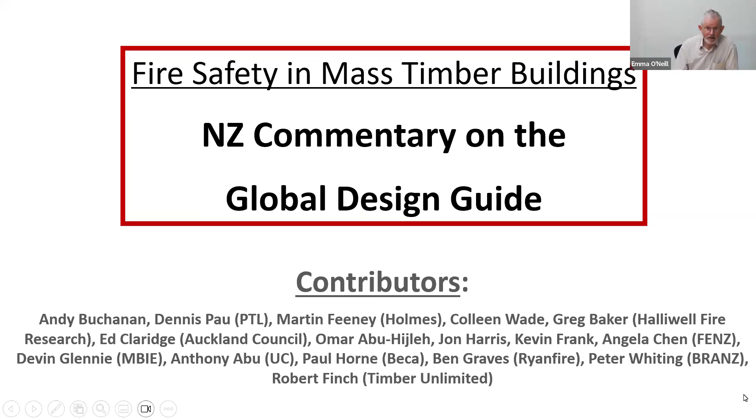Robert has introduced us to a lot of what we're going to be talking about. I'm going to get moving because I've got a lot of slides, and some of them I'm going to go through rather quickly, but let's get on with it. I don't have to tell you this.

What is mass timber? Well, it's glued laminated timber, glulam. It's laminated veneer lumber, LVL, for long, straight and strong things. And it's cross-laminated timber for walls, roofs and floors, anything you can make out of large flat panels.

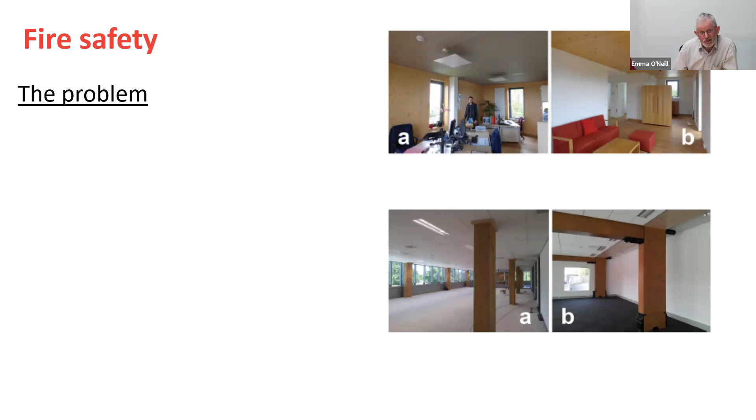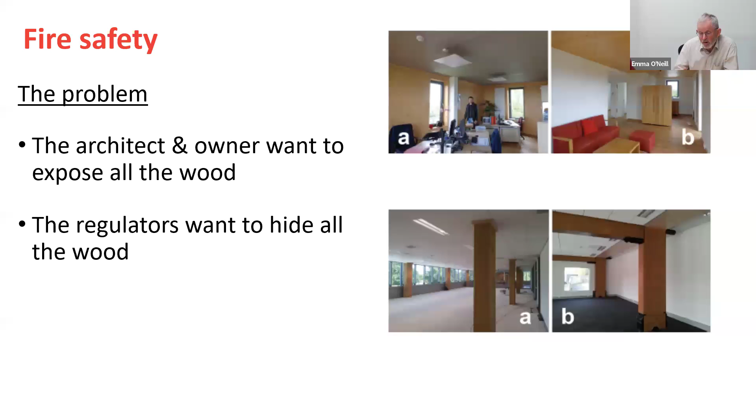Let's jump right into fire safety. What is the problem? It's as simple as this: the architect, the building owner and the supplier want to expose all the wood that they can, but the regulators want to hide as much wood as they can because they're afraid of it reducing the fire safety of the building.

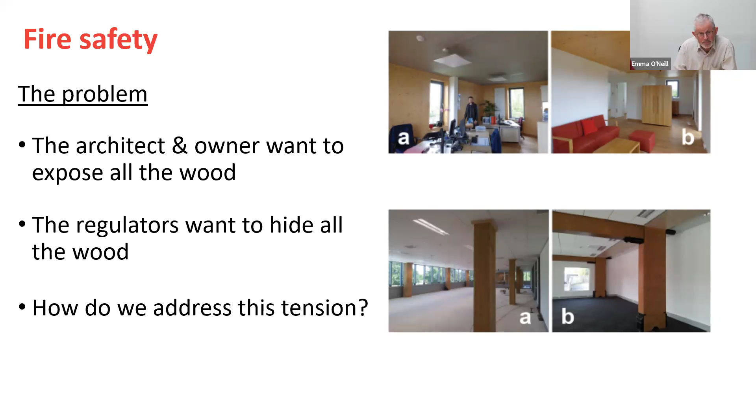So let me say a bit more about each one of those, because it's a little bit tricky, but at the end of the day, there's lots of information there.

The Global Design Guide was launched at FireNZ in 2022. That's the cover of the book. You can buy a hard copy, it's not cheap, but you can buy it from anywhere that sells books. And you can get a free online version from the Timber Unlimited website, or just Google it, lots of places.

What's in there are 14 chapters. I'm not going to go through them all because we'll be going through them all again. The authors were from 12 countries, including several from New Zealand. So that was the original document, but it was a global document and it did not refer to the New Zealand Building Code. It wasn't really useful to New Zealand designers.

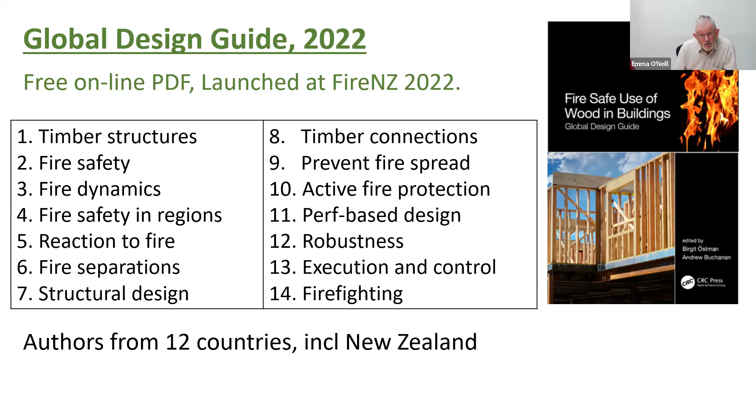So that's why we decided to write a New Zealand commentary. But on the way to that, we said, let's write the conclusions first, because people need to know what to do right now, just as Robert said. And this is a supplement to the acceptable solution and the verification method. That's why we call it the supplement.

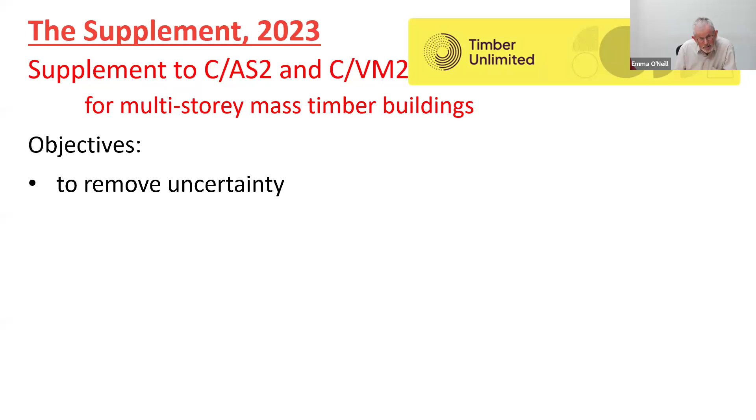And the objectives were to remove uncertainty in the design and construction of multi-storey buildings, especially multi-storey mass timber, to show what's possible, and to help owners, developers, architects, engineers, regulators and the timber industry so that everyone is on the same page.

This is not a building code, it's a guidance document. But the whole intention here was that if the guidance document had been written by the entire spectrum of people, from the designers and suppliers to regulators, then we hope it will be a useful document for everyone to use. And there may well be changes to the building code along these lines, but not yet.

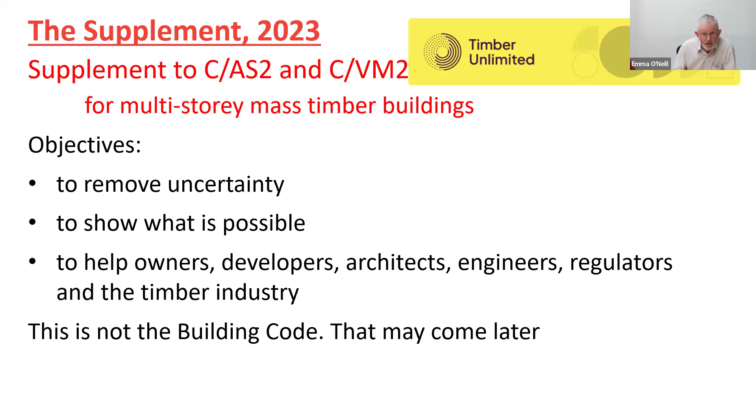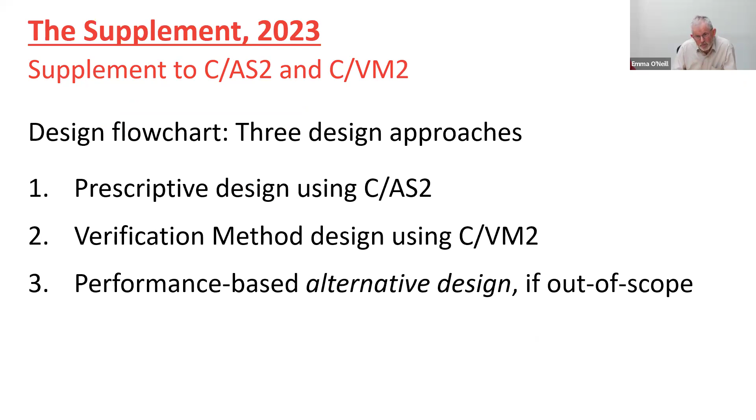Okay, just to say what's in there: a design flow chart with 3 design approaches. This is all obvious stuff, fire engineers know all this. The prescriptive design, a verification method, and a performance-based alternative design for buildings which are out of scope of the document. The flow chart looks like this.

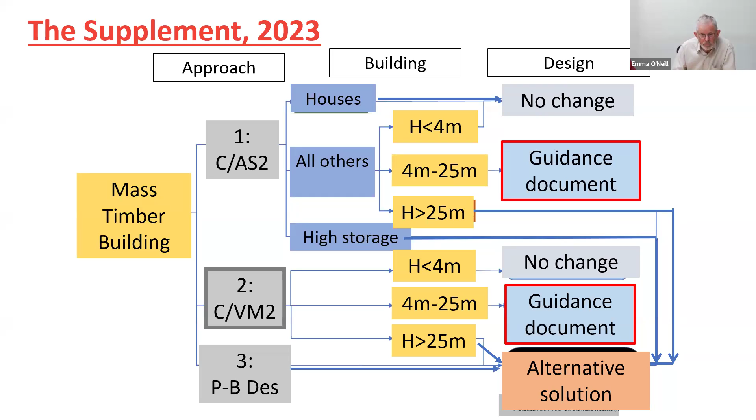I'm not going to spend any time on this, but it's a very useful flow chart. Angela Chen at FENZ drew this flow chart for us, and it just is a guidance of how to get through the document and which buildings it applies to and which ones don't, and when you've got to do an alternative solution.

A few details in there. This table is a very important table, and if you're doing a prescriptive design... this is really aimed at architects, engineers and builders who are not fire engineers. You can see here on the left-hand side, we've got different heights of building, because height is very important.

And then we've got sprinkled and unsprinkled buildings. If we're less than 4 meters in height, in other words 1- and 2-story buildings, we just follow the 30 or 60 minutes from the building code, and you can put in as much wood as you want, WU, wood unlimited. If it's an unsprinkled building, as the building gets taller, you can expose less wood. For a sprinkled building, you can use more wood. You can read all that stuff there.

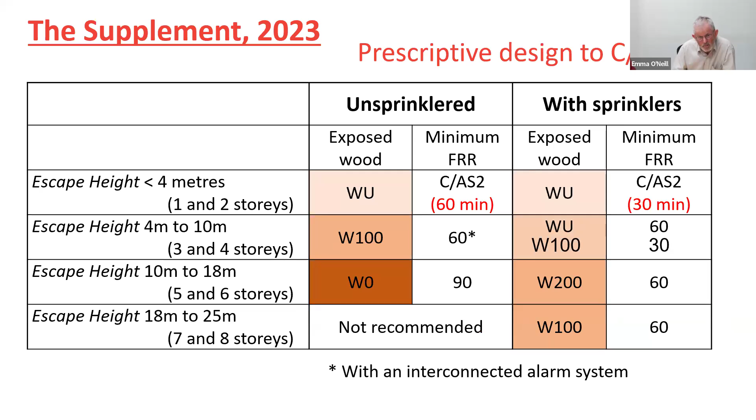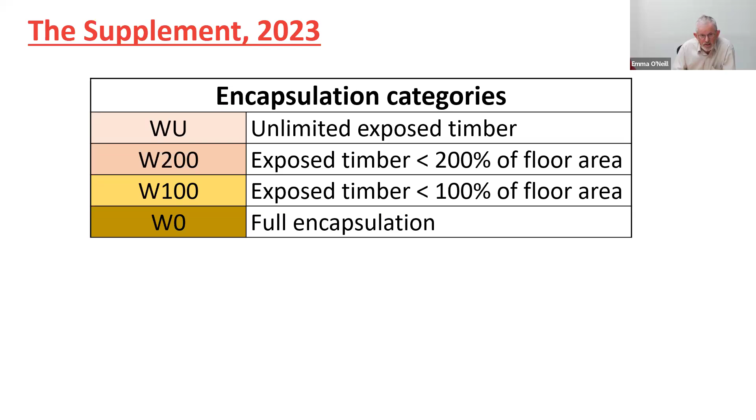I'm not going into any detail, but I am going to explain what we mean by W100, W200, and WU, which is unlimited. W200 means you can expose wood up to 200% of the floor area, lots of wood. W100 is intermediate. W0 is exposed no wood—it's full encapsulation. I'll quickly give some examples of those.

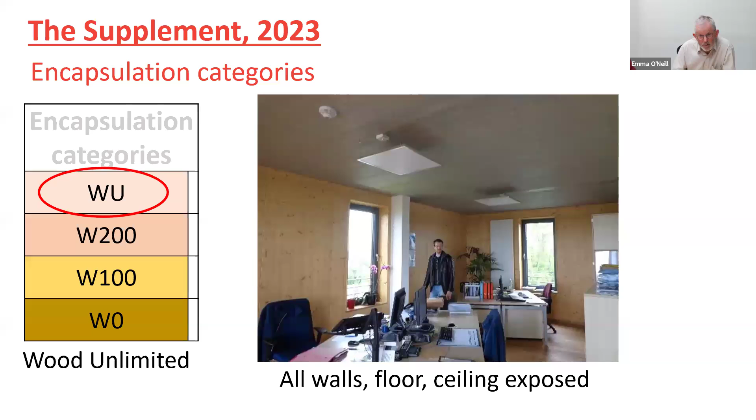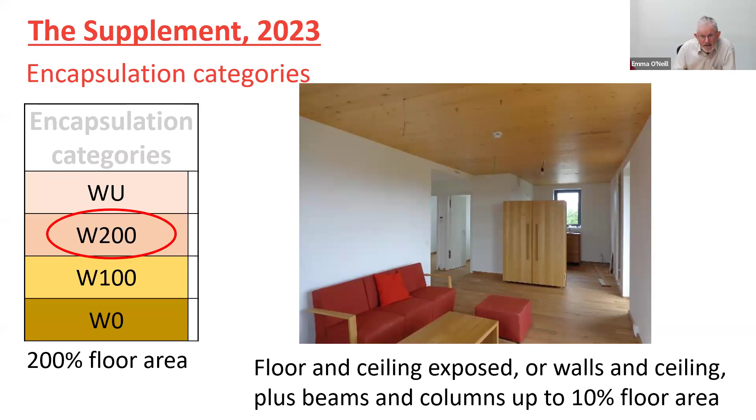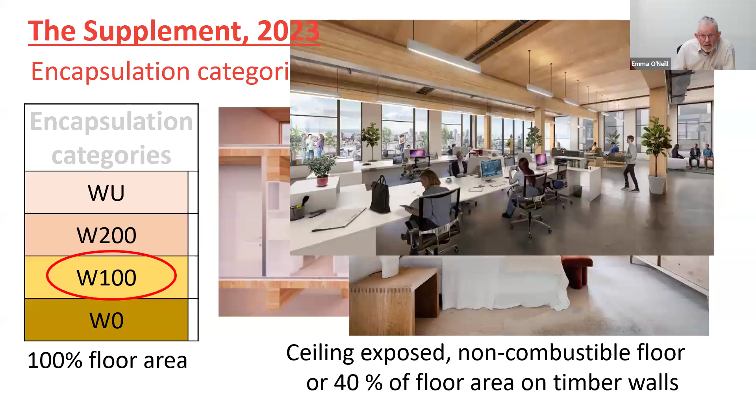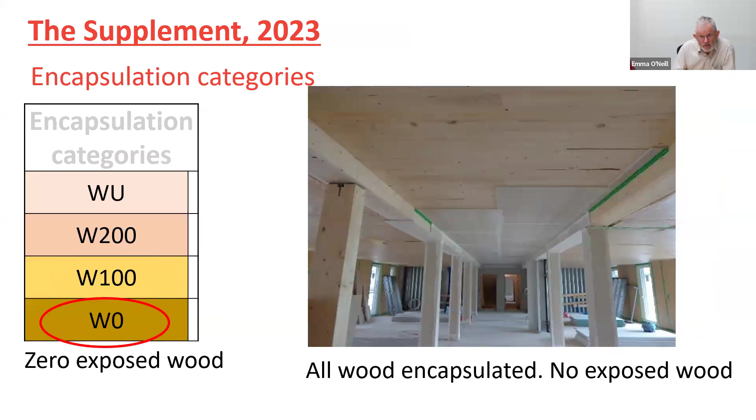The W0 is for zero exposed wood, and it's a building like this. You can see a lot of wood here, but it's all being encapsulated. The gypsum board is all being placed, and there will be no wood visible in that building. This building, the Brock Commons building in Vancouver, which was for a short time the tallest mass timber building in the world—you can see a lot of wood there during construction, but when it was finished, every piece of wood was covered in 3 layers of type X gypsum board, and there was no wood exposed at all. Why was that? Because the fire authorities would only allow that tall residential building if that was the case.

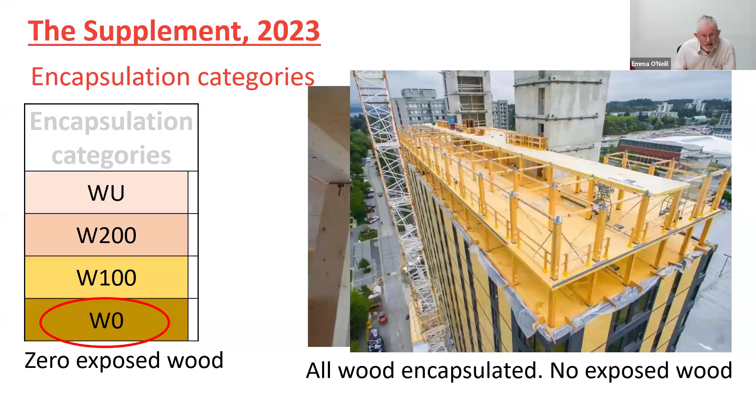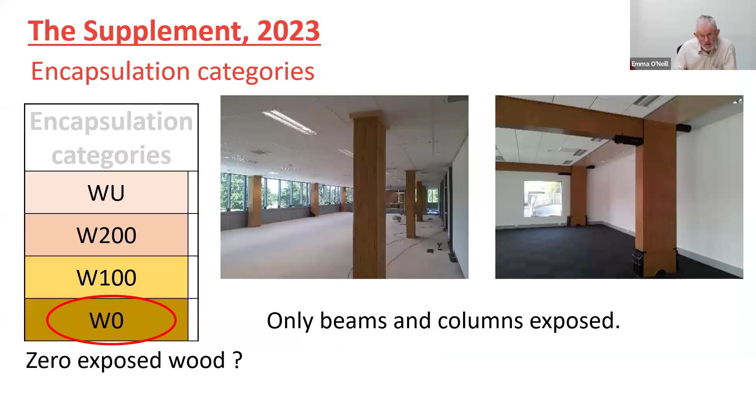Sometimes there's an intermediate case where there are just beams and columns. If there are beams and columns with no flat surfaces, then there's not a whole lot of wood to get involved as fuel load, and so this could be considered zero, but there's a question mark there because it has to be considered on a case-by-case basis.

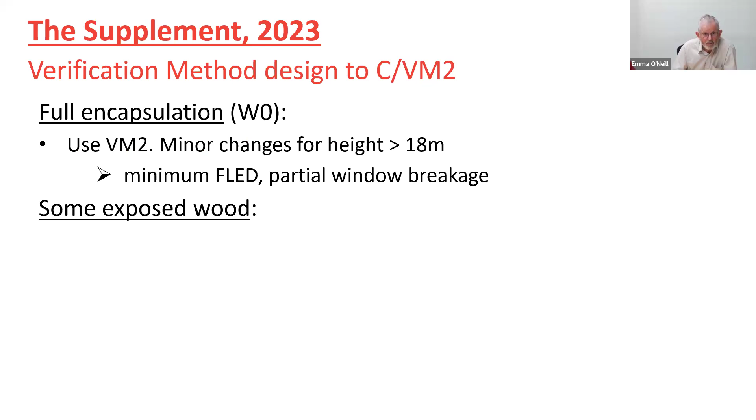Okay, a couple more things about the supplement. It talks about full encapsulation or some exposed wood. For the full encapsulation case, the fire engineer can ignore the wood—just use verification method VM2, with a few changes for tall buildings.

If there is exposed wood, that wood has to be included in the fire load. This is really the reason for all of this stuff, because the New Zealand Building Code does not anticipate an exposed wood structure which might double the fuel load, because it's all written around steel and concrete buildings. So the story here is that the fuel load, the wood which is exposed, must be included in the fuel load for the engineering calculations, and all the other wood has to be encapsulated.

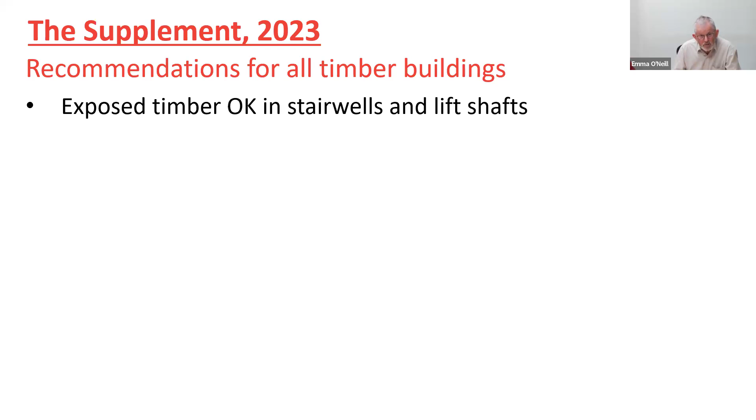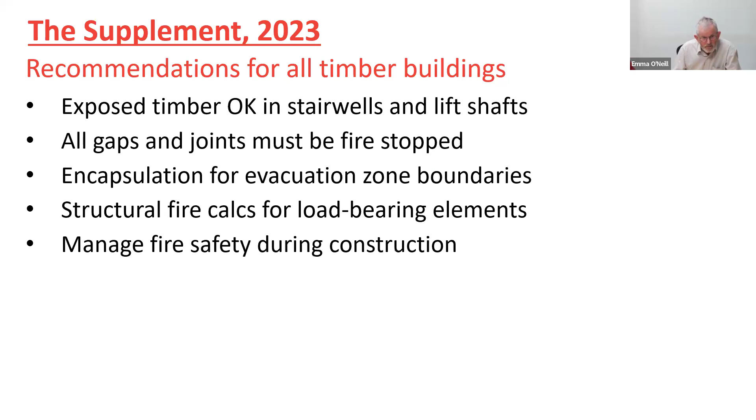The methods for doing that are all in the Global Design Guide and the New Zealand Commentary. There are a few more recommendations in here, which I'll go through quickly to address real problems in real buildings. It's okay to expose wood in stairwells and lift shafts. All gaps and joints must be fire stopped. Evacuation zone boundaries have to be encapsulated. Structural fire calcs, I'm going to go into in a bit more detail. Fire safety during construction is very important—I'll come back to that.

But these special things really are for tall buildings, because these concerns about fire safety in a mass timber building are just not a problem for 1- and 2- or 3-story buildings. But when we start getting to 5, 10, 15-story buildings, then there are big concerns.

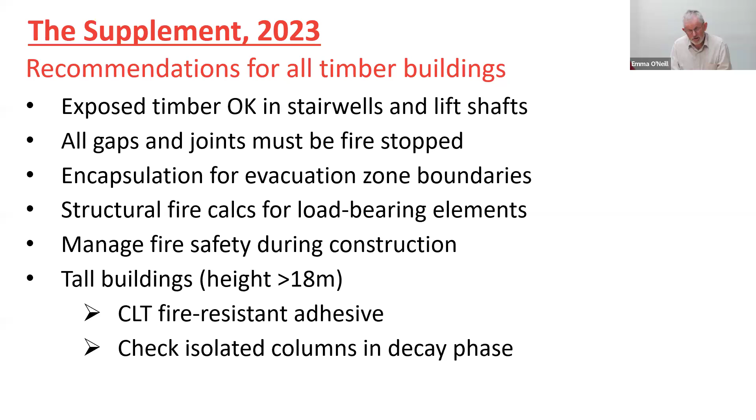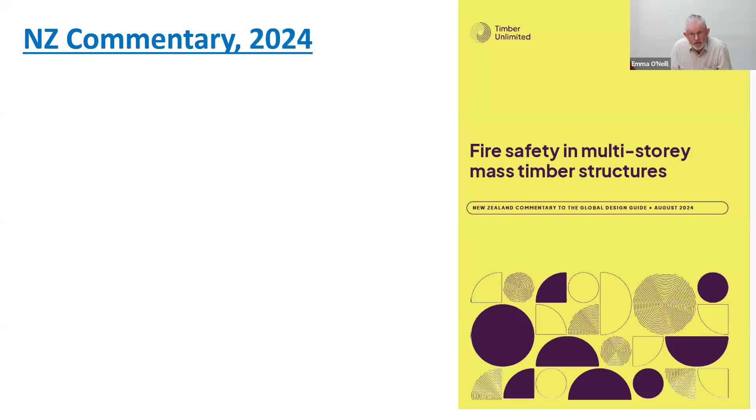And that's why this stuff is all related to height. Okay, that was the document—we've had two documents now. We've talked about the Global Design Guide and we've talked about the supplement. I'm now talking about the third document, which is really the talk of today, which is the New Zealand Commentary, which was just published in August, and that's the cover of it. Once again, all of these documents are free online as PDFs. They're available on the Timber Unlimited website, and this part of it is a draft for public comment.

Comments are welcome. However, as Robert said, the comments are not going to be addressed very quickly until there's a funding mechanism to do that.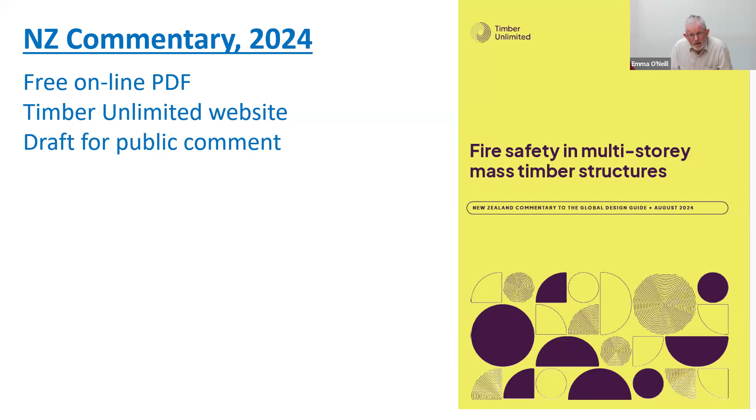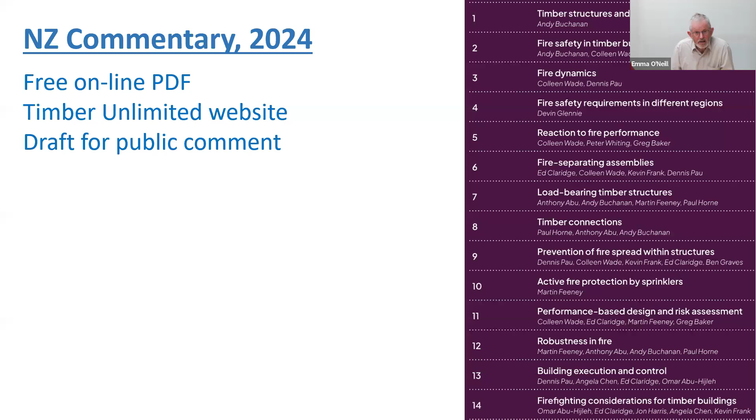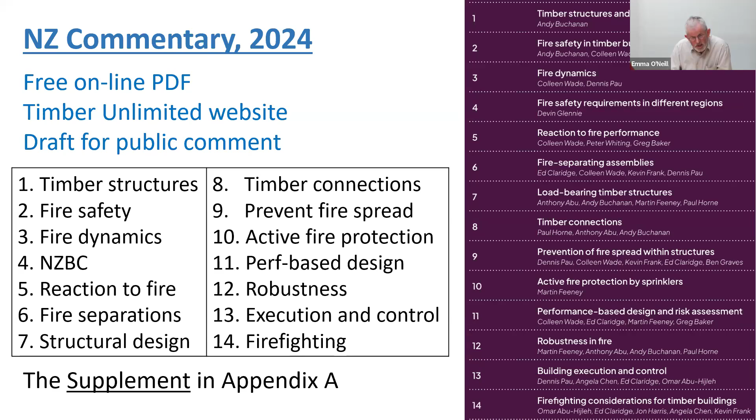Any of the authors. So that's now on the right-hand side, the table of contents of the commentary. There are 14 chapters, the same 14 chapters as in the Global Design Guide, and this document has been written alongside it. In small print, you'll see all the authors of each chapter listed, and they're all people in the New Zealand fire engineering community. So there are the 14 chapters, and off the bottom of the list, Appendix A is the supplement we've been talking about. So we said there were 3 documents, but there are really only 2, because the supplement is now Appendix A to the commentary.

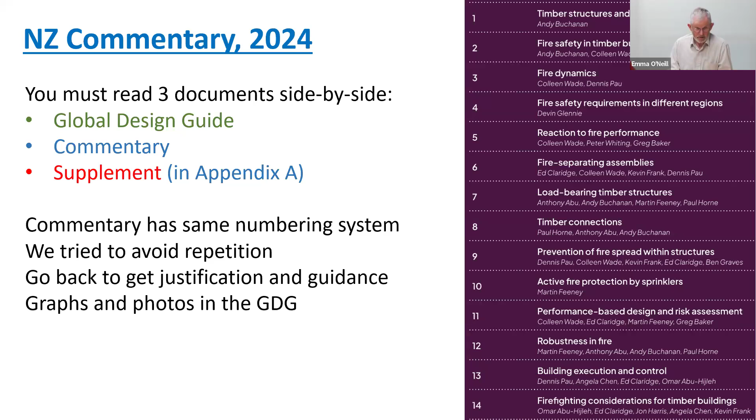This is very important. Robert said this: if you're going to use this stuff, you must read 3 documents side by side - the Global Design Guide, the New Zealand commentary, and the supplement, which is in Appendix A of the commentary. The commentary has the same numbering system. We tried to avoid repetition, but you'll have to go back sometimes to get justification and guidance, because lots of stuff, graphs and photos, are in the Global Design Guide, and for copyright reasons and other reasons, we haven't repeated that in the commentary. You need to look at both documents. But if you've got 2 screens on your computer, it'll be no trouble at all.

So what I'm going to do now is run through these chapters one by one. I can't tell you a whole lot, but I can tell you a little bit about each chapter.

Chapter 1 is about timber buildings and timber and wood products, and what it describes is what's different in New Zealand. It says something about CLT and LVL, where they're available, and what their properties are. So there's no fire engineering in chapter 1 - it's just about wood properties and timber buildings.

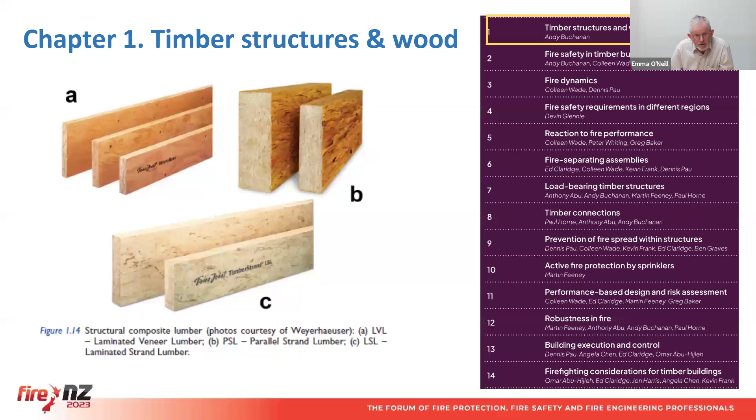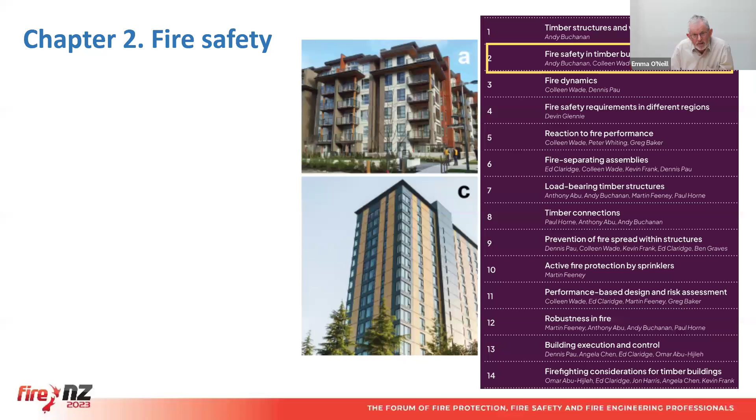Chapter 2 is a sort of fire safety 101, if you like - an introduction to fire safety for non-fire engineers. It talks about fire safety in lots of buildings, but especially in tall buildings, as I mentioned before. These are tall timber buildings, and fire safety in those is very important.

There are 3 or 4 words I want to talk about here because they're explained in this chapter. The first is the concept of fire resistance. You all know about fire resistance - it's 30-30-30 or 60-60-60, which relate to structural performance, integrity, and insulation. That's old stuff. If you want to know more about encapsulation, I'll mention it a bit more, but encapsulation is defined in chapter 2.

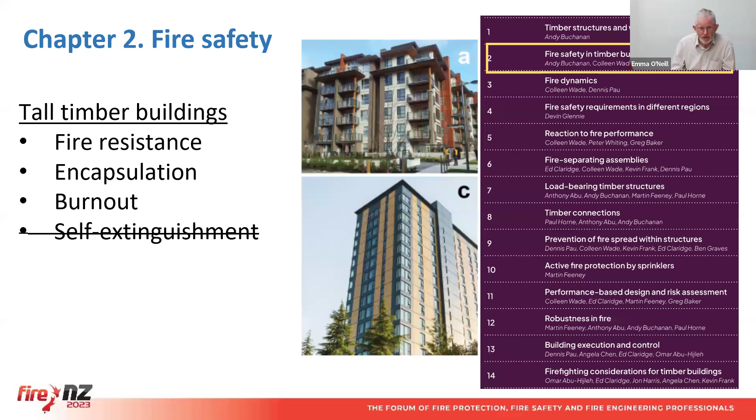The third thing is this concept of burnout. By burnout, we mean a fire occurring in a building with no intervention - sprinklers not working, fire brigade unable to get there - so the fire is left to burn itself out. That's really the fear in a timber building: when will the fire go out? When we started writing this, we said you just wait until self-extinguishment occurs, but I've crossed that word out because we don't use self-extinguishment - it's such an emotive word, it means different things to different people. In a fire in a timber building, the flaming will stop, but the charring may never stop, so we can't guarantee self-extinguishment. At some point, the firefighters are going to have to get into that building and do something about it. So that's just a definition of those terms.

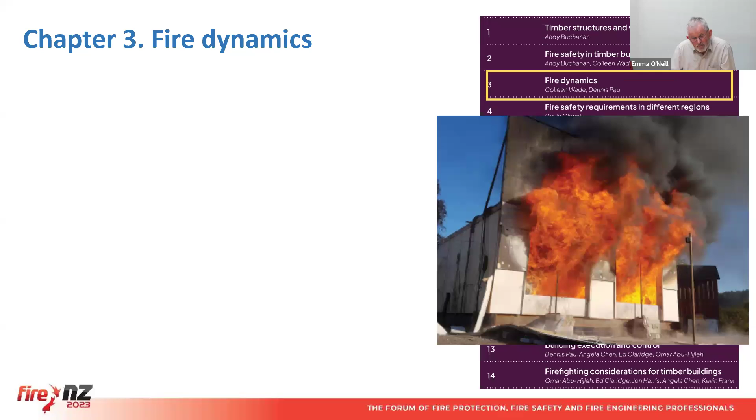Okay, I'm going to jump to chapter 3, fire dynamics - what is going on inside the building with all the flaming of the fuel, including exposed wood. You can see a picture with huge flames coming out windows, and that's something that will happen. If you double the amount of fuel in the building, you'll extend the duration of the fire and have much bigger flames out the windows. The severity, or the temperatures in the fire, may not be much different, but the duration of burning and the flaming out the window increases. So go back.

Now, Colleen Wade, who was at BRANZ, this is her chapter, and she wrote this chapter in the International Global Design Guide. What's in the commentary is just an update of that, brought back to New Zealand conditions. The main part is what we call the iterative method for fire severity, often called the Brandon method, because Daniel Brandon in Sweden developed this method to calculate fire severity in a compartment with exposed wood. There's also some relaxation to that method, some limitations, details, recommendations for external fire spread, and information on char depth calculations, since an output of the iterative method is the char depth when flaming combustion stops. There are also worked examples in there.

So from a fire severity point of view, for a fire engineer starting work, especially for VM2 or alternative solution, this is the critical chapter to get into. This tells you about the fire.

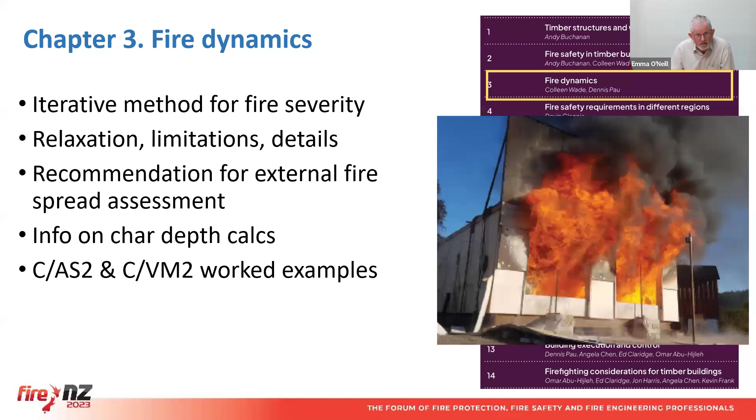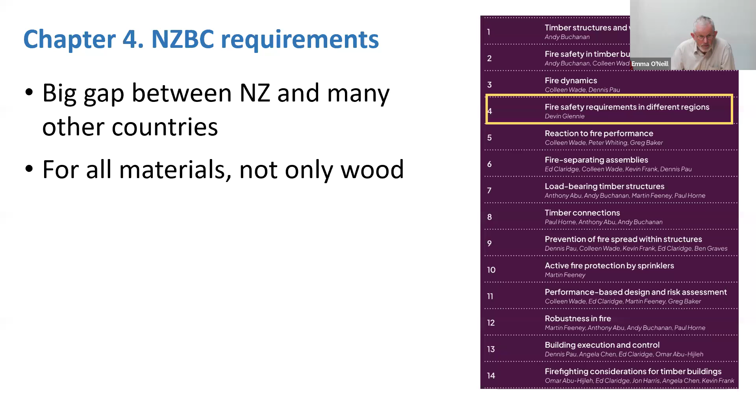Chapter 4 is about the building code requirements. In the original design guide, it's got a comparison of all the countries of the world. But what Devin Glennie from MBIE has done in the commentary is zero in on the New Zealand requirements. One of the things he's pointed out is that there's a big gap between New Zealand and many other countries.

I'll just show this little chart, which is in there, taken from Build magazine in 2021. What it shows is that in these 3 countries, if you compare the fire resistance ratings - I'll zero in on an 8-story building - in New Zealand you'd need 30-minute fire resistance for an 8-story building with sprinklers. In the US, it would be 120 minutes. In Australia, it would be 90 minutes.

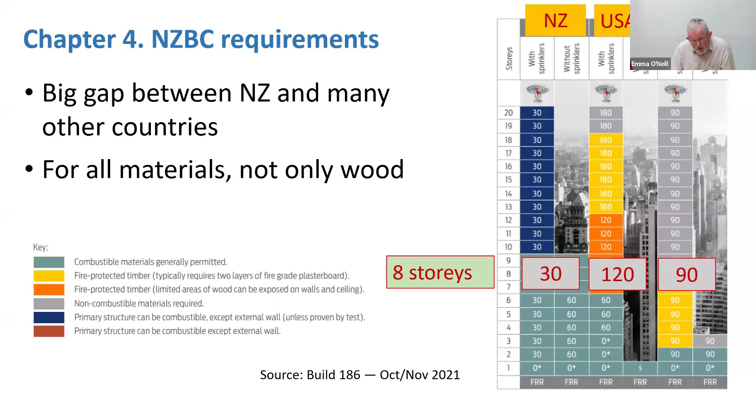So our fire resistance ratings - and this is not just for wood, this is for all materials, but if wood is involved then we get more concerned about it - if you want to know more about that, read chapter 4.

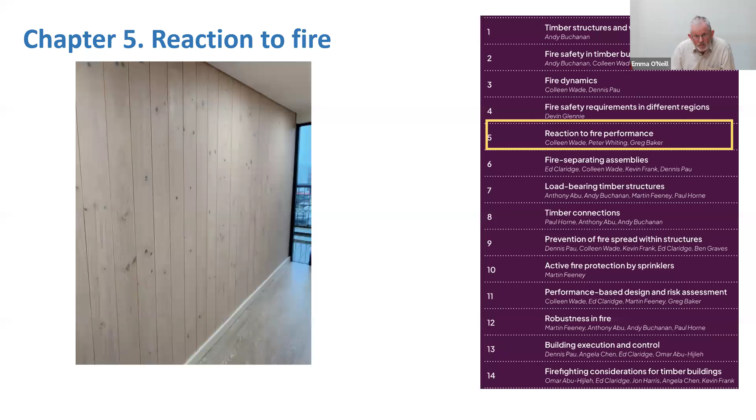Okay, chapter 5, reaction to fire. We're talking here about the early fire hazard, and these are photographs which Ed Claridge from Auckland Council has put in, because these are buildings he's been involved in, and places and buildings where we have to address the group number to avoid rapid flame spread over the surfaces.

So these restrictions and the types of coatings available and the New Zealand building code requirements for group numbers are all in chapter 5, along with the translation of the European requirements, which was done when the group numbers were introduced, to make sure that equivalent products from other countries can be used. That's all there in chapter 5.

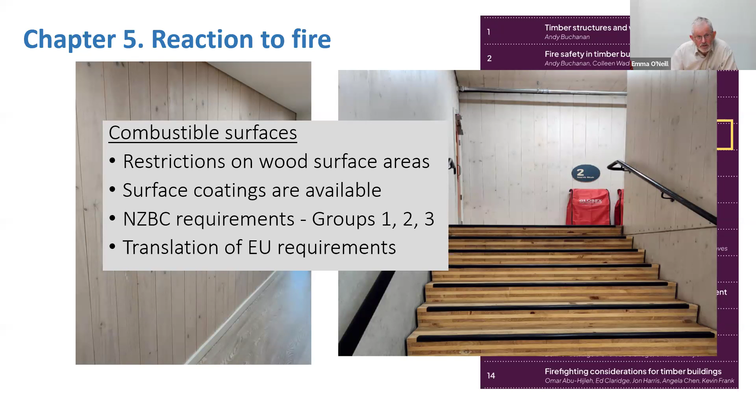Chapter 6 - I'd have to say here we're going to see 2 chapters, because chapter 6 is about fire separating assemblies, and chapter 9, a bit later on, prevention of fire spread within structures. There's quite a lot of overlap between these chapters, but Ed Claridge put this chapter together, and Dennis Pau put chapter 9 together. I'll just let you know, you may find that you get referred to another chapter. The separating assemblies are all about how to produce walls and floors which have got fire resistance ratings to prevent the fire spreading from one compartment to another.

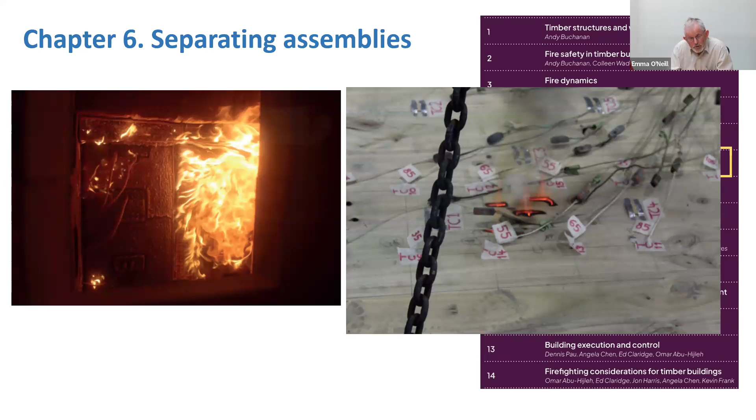All of that stuff is spelled out in Chapter 6 of the Global Design Guide, modified for New Zealand conditions in the New Zealand commentary.

This is also in Chapter 6, the criteria, the test methods, protective materials. Encapsulation is defined again, and it's a bit tricky. Full encapsulation means the wood never sees the fire and doesn't get hot.

We've got to be very careful with these words about partial encapsulation and limited encapsulation, because there are two issues here. One is not thick enough encapsulation, so the wood starts charring after a certain time. The other problem is where you've got encapsulation on some walls and not the other.

You've got to look up the definition before you use those tools, and then calculation methods.

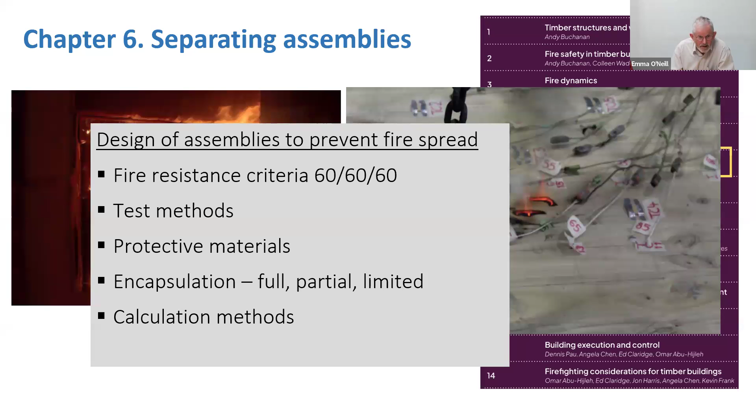Okay, I'm now jumping to 7 and 8, because these are for structural engineers. Chapter 7 is load-bearing timber structures, structural performance, and Chapter 8 is about timber connections. Anthony Abu from the university, with help from others, wrote Chapter 7, and Paul Horne from Beca and the university wrote Chapter 8.

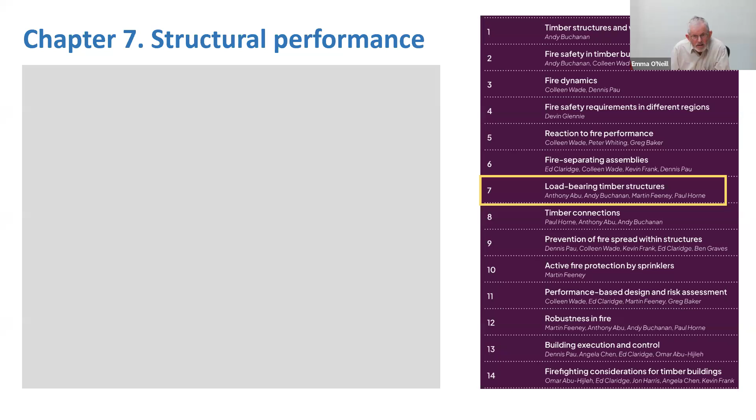I can only say a little bit here, but Chapter 7 has some interesting stuff. For the structural engineers listening, you should all be aware of the joint standard, AS/NZS 1720 Part 4. This has not yet been adopted by MBIE, but it is what most people are using. It's a companion document to the new 1720 Part 1, which is the new Timber Design Code.

The old document, 3603, had a chapter on fire. The new NZ 1720 Part 1 says nothing about fire because it's here in this document. The new thing which appeared from 3603 was the zero strength layer of 7 millimeters.

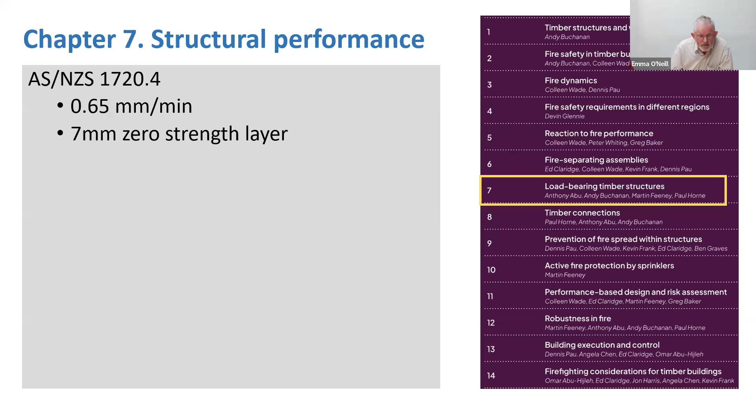However, there's a lot going on in the world of structural fire engineering, and the next block of stuff is in Eurocode 5, because we're watching what goes on in Europe, as they're more advanced than we are. What we've put into the commentary are these other requirements from Eurocode 5.

It's the same charring rate of 0.65 millimeters a minute for a plane surface, like a slab or a wall, but to allow for the corner rounding at beams and columns, which used to be in 3603, the charring rate increased to 0.7 millimeters a minute.

But the one thing that will worry some of you is that after a lot of research, the zero strength layer has been increased from 7 millimeters to 10 for tension and bending, or 14 for compression members. So that will make a change, and that makes things worse for designers.

On the other hand, to increase the characteristic strength from the 5th percentile to the 20th percentile, you can increase the strength by 15% according to that. I'm not going to say any more. If you want the details of this, you go and look there.

These new requirements are not in the New Zealand Building Code, but they are the direction the world is heading. If you're designing a very major, critical, tall timber building, then the recommendation is that you would use these new requirements.

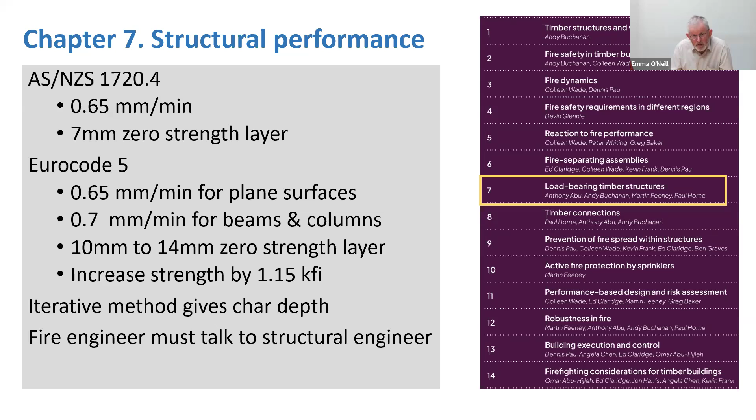Just also to remind you that the iterative method, the Brandon method from Chapter 3, gives you the char depth, and the fire engineer must talk to the structural engineer. For a steel and concrete building, the fire engineer and the structural engineer can exist in different offices and never talk to each other. But if you've got a mass timber building, you have to talk to each other because there's so much overlap.

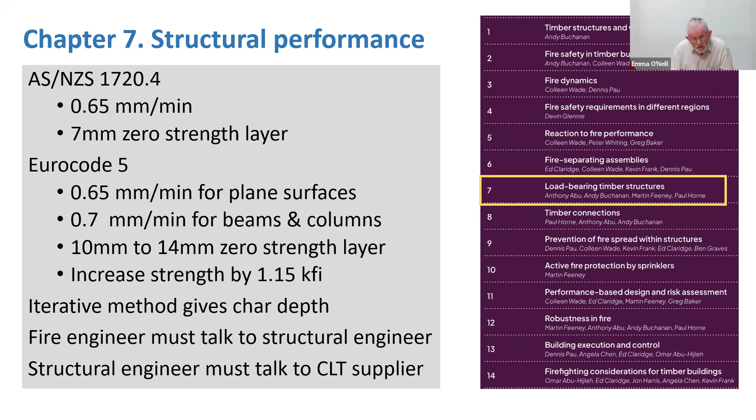And the structural engineer must talk to the CLT supplier, because for most CLT that we have, certainly for Red Stag and XLAM, the design methods with charring, you don't go that way. You go to the manufacturer's load span tables and look at those, and if you've got a problem with them, you go and talk to them.

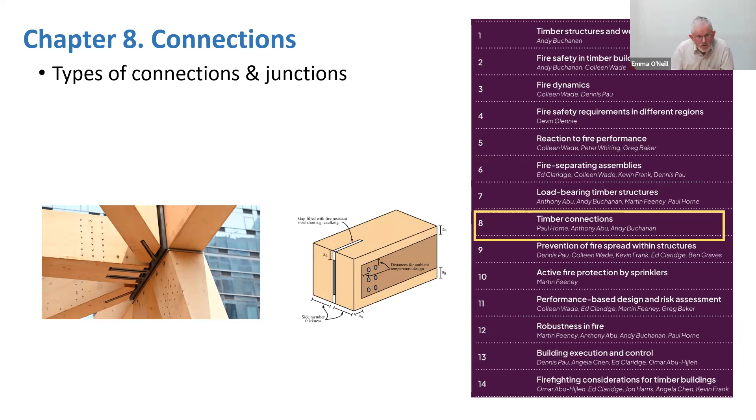Okay, that's Chapter 7. Chapter 8, connections. Here's a nice photo of a connection with internal dowel plates and a sketch from the commentary, which Paul Horne has put together. This chapter talks about types of connections and junctions, exposed, concealed, examples, design approaches, detailing, protection. And this is not so easy.

Designing beams and columns, in theory, is easy. If you know how much charring there is and how much wood is left, you just do your design. But it's much more difficult for connections, especially if there's exposed steel.

What Paul has done in this part of the commentary is gone back and leaned on Eurocode 5. He says if you want to do it in a quick and conservative way, he's given some guidance from that document. If you want to dig into it and do it properly and thoroughly, the suggestion is to go to Eurocode 5, because they are far ahead of anything else in North America, New Zealand, or Australia in terms of understanding the fire performance of connections like this.

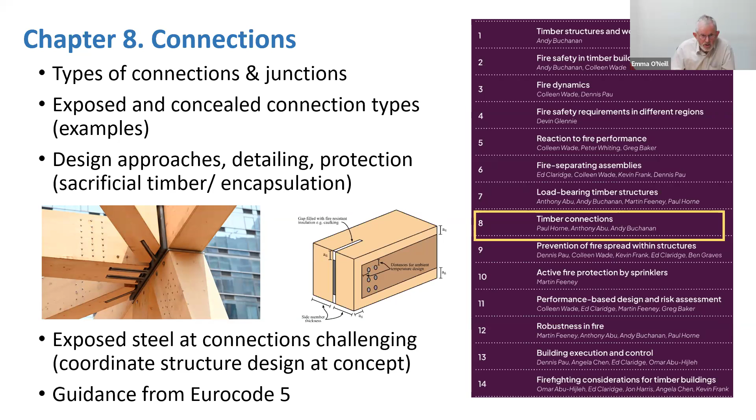The manufacturers are coming through this, and one of the co-authors of this chapter got some assistance from Ryan Fire, because they're the people who've done a lot of these tests, and I'd like to thank them for their assistance in this chapter.

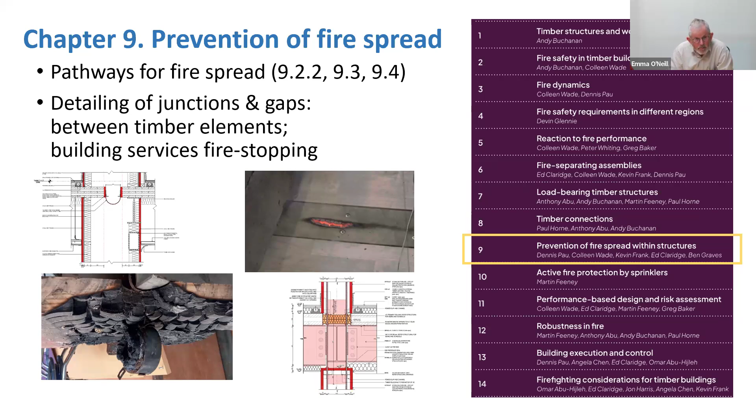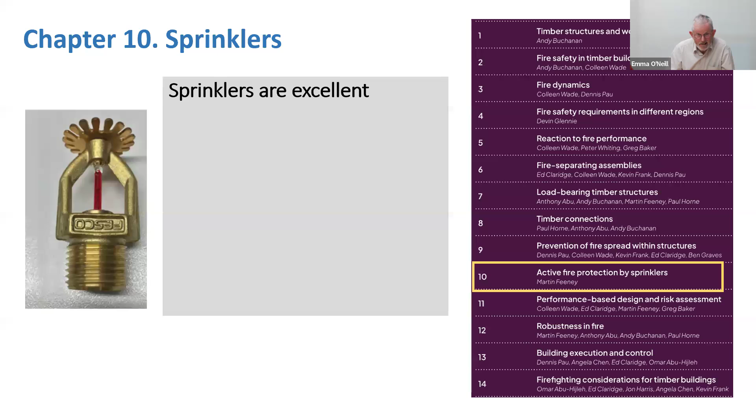So that's Chapter 9. Chapter 10 is about sprinklers, active fire protection by sprinklers, and this is really simple stuff, but at the end of the day, it's not so simple. The simple thing is that sprinklers are fantastic. They're the best way you can improve the fire safety in a building. You get no flashover, and if they work properly, you need zero fire resistance.

However, they don't always work. We cannot rely on them 100% because there might not be enough water in the street, they might be down for maintenance, or there may have been an explosion or an earthquake or something, which we'd rather not know about, but we have to allow for that. So for most buildings, we have to provide structural fire resistance for burnout, even if there are sprinklers, on the basis that we cannot rely on the sprinklers completely.

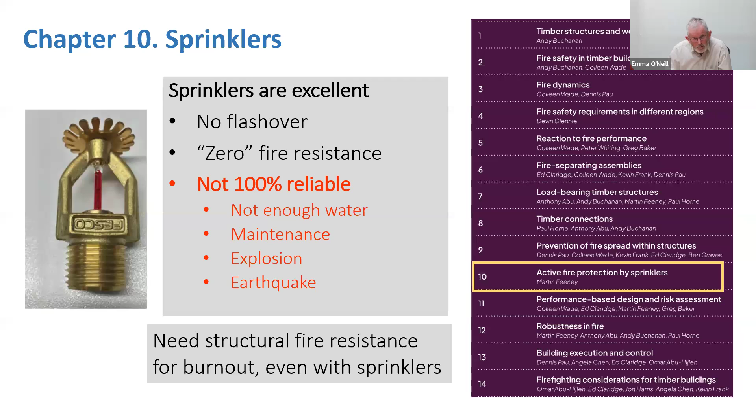Martin's written something about that, and there's more about that in Chapter 12 I'll come to in a minute. So these chapters at the end are less about practical details; they're more about the philosophy behind it and where to go. If you're doing an alternative solution and you want justification, go see Chapter 10.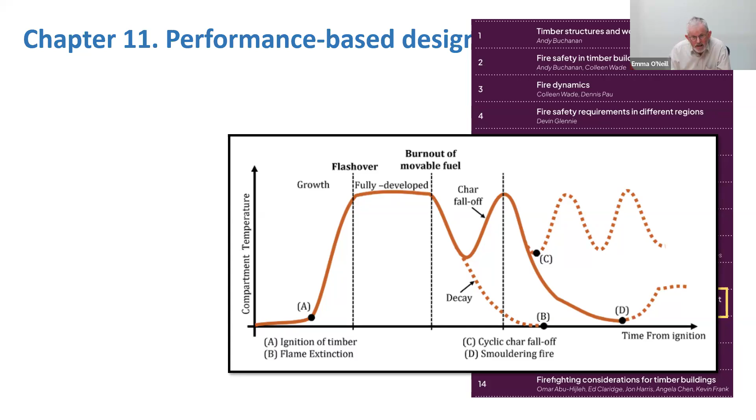You can see in this graph here, fire growth, ignition, fully developed fire, and then the fire going out towards burnout. What we really don't want is falling off of protection so that we get a second flashover, or a third, or a fourth. The philosophy behind that is all written in here.

Colleen talks about the principles of performance-based design: determine the objectives, define the fire scenarios, what are the pathways to compliance, and what is the risk assessment. So that's all in there.

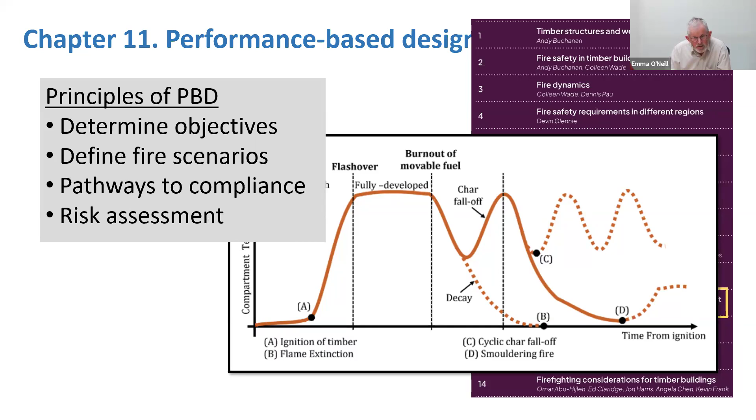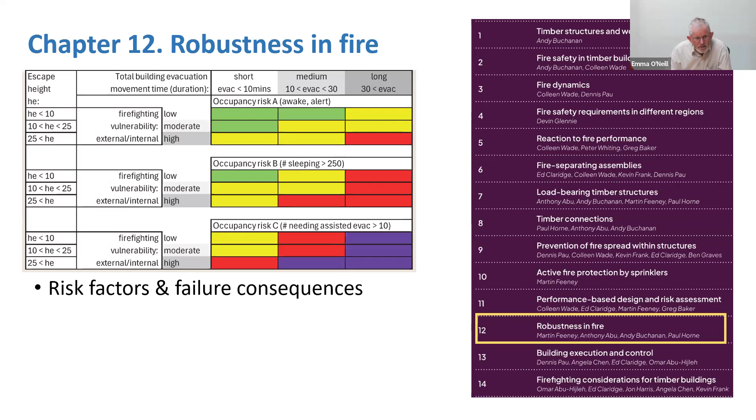Chapter 12, Martin Feeney's put together a risk matrix, which is very useful. We don't have time to go into it now, but Martin has done this, and it looks at the risk factors and the failure consequences. It gives a background to the FM factor, which reduces the fire resistance for putting in sprinklers, the exposed surface area limits, and the strength reduction with temperature, which is a bit of a red flag, only mentioned here and nowhere else.

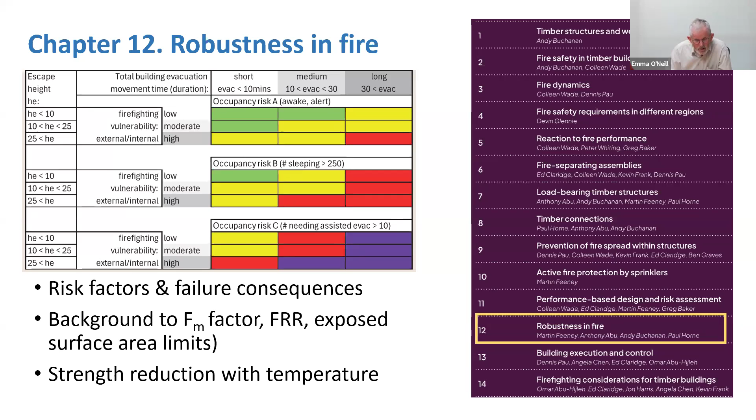A lot of you heard Jean-Marc Franssen speaking at seminars last year when he visited New Zealand, and we know that if you have columns exposed to fire, there's a thermal wave in the column which will reduce the strength as the fire's going out, even with quite low temperatures. I won't say more, but it's mentioned in chapter 12 and also chapter 7.

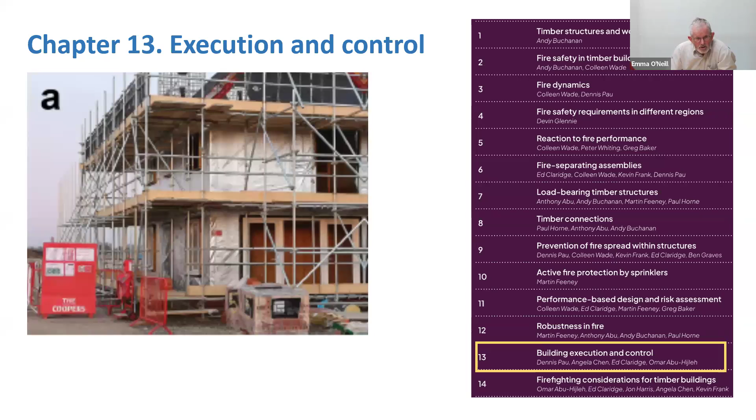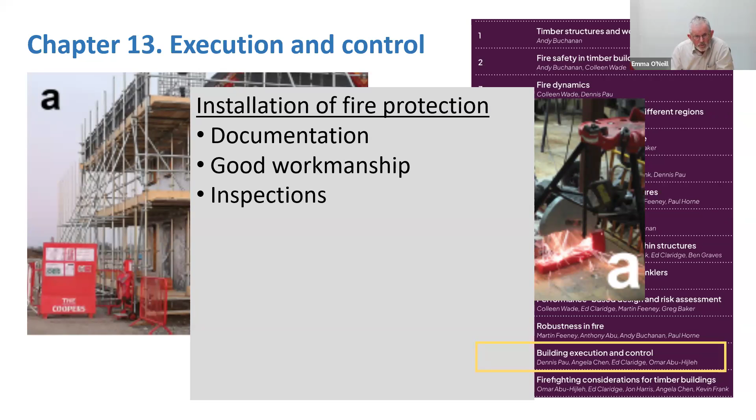Nearly at the end here, execution and control. There are two parts to this chapter: it's about fire safety precautions, documentation, and avoidance of fire hazards - installation of fire protection, documenting the fire requirements, providing good workmanship, inspecting everything to make sure it all gets done. The second and biggest part is fires during construction.

If you talk to people in the US and the UK, where there are more and more tall timber buildings, what's the problem? Again and again, the problem is fires during construction, especially fires started by hot works, before the active systems like sprinklers and before the Gib linings and passive systems are installed. So this is a very useful chapter. If you're writing the specification for fire safety in a tall timber building, go to this chapter and take out the checklist. There's a lot of stuff in there regarding staff training and liaison with FENZ.

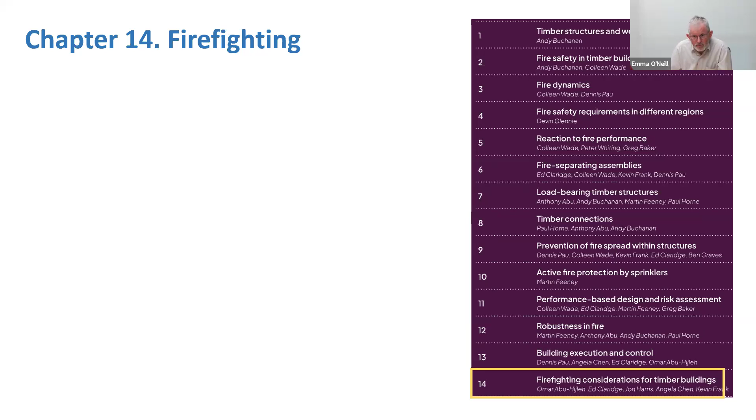The last chapter is chapter 14, and I'll acknowledge Omar, who's now moved to Australia, but Angela Chen at FENZ, Kevin Frank at FENZ, and Jon Harris at FENZ all helped put this chapter together, with some help from Ed Claridge.

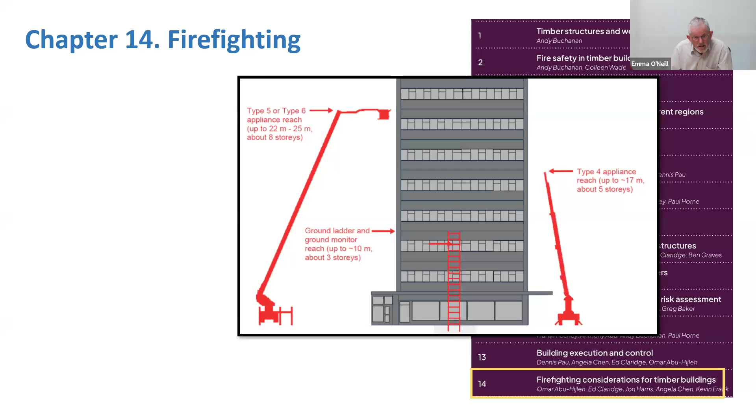There are diagrams like this, because this was not covered at all in the Global Design Guide. This talks about the New Zealand situation - which kinds of appliances we have in which cities, and how far they can reach - including limited appliance numbers, the reach, pre-incident planning, overhaul procedure after the fire's out, and firefighting water demands, etc.

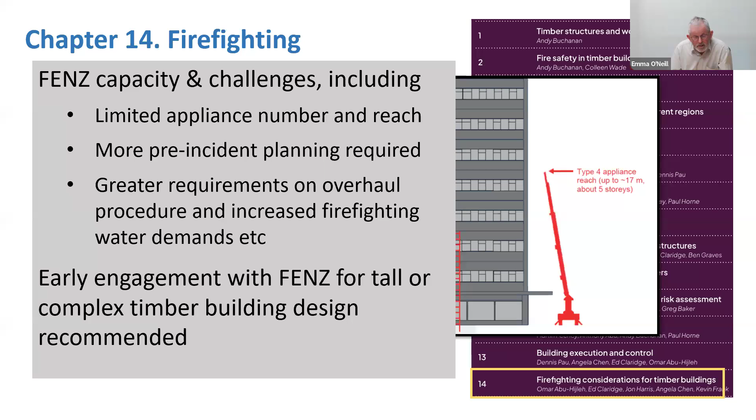The takeaway point from this is that early engagement with FENZ is strongly recommended, because, as you know, the engineering section of the design review unit may well be looking at your building. So the earlier the better.

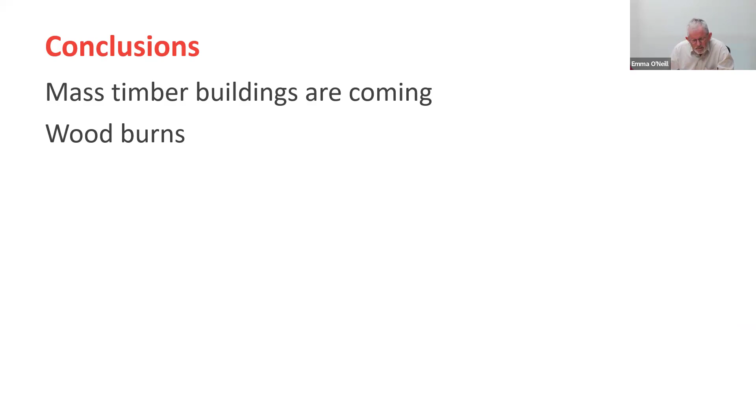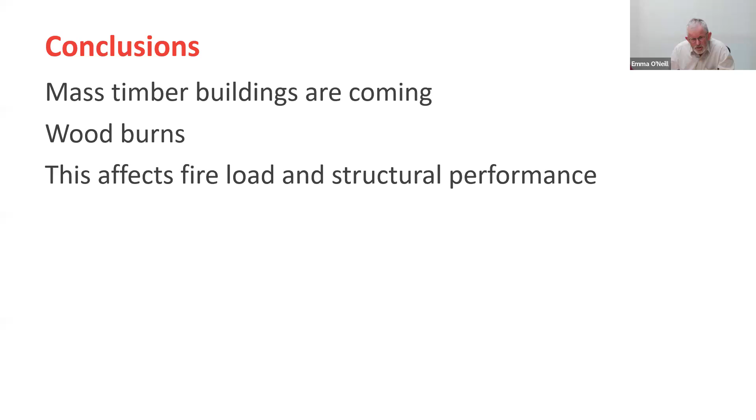Fire engineering brief. Okay, conclusions. Mass timber buildings are coming - we can't stop them, like it or not. Wood burns. If exposed wood is in the building, it's going to burn, and there are ways of reducing the flammability, but not really reducing the fire resistance. This affects the fire load and the structural performance, and this is why the fire engineer and the structural engineer have to talk to each other.

Solutions are available, and in these three documents - the Global Design Guide, the commentary, and the supplement - they will all help with possible future code changes. But we need your help to make this work. So the authors want to know what works in here and what doesn't, so we can make changes.

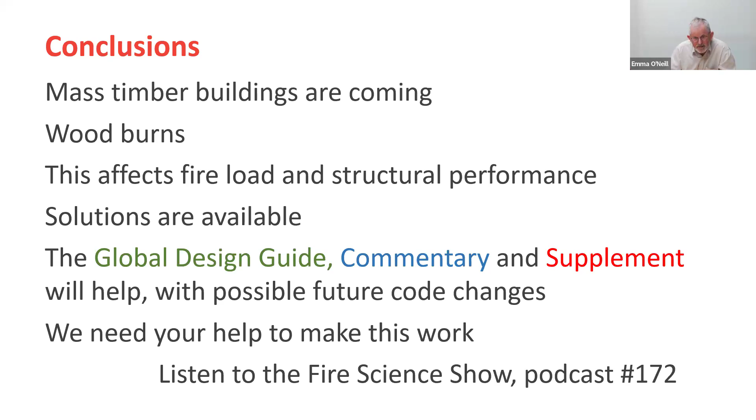Okay, that's all, I'm finished. Time for questions.

Thank you, Andy, that was great. We have a few questions here, and if anyone else has more questions, please add them in the Q&A chat box.

So can you please elaborate on exposed timber, if it's okay in stairwells and lifts? Okay, yes, I have to say this is a contentious topic. In some parts of the world, in Europe, most European countries, you won't see any wood in a lift shaft or a stairwell - it's all non-combustible.

As far as we've gone, the authors of the commentary, what we've said is that for buildings of a certain height, it's not a problem to use exposed wood in the stairwells and lifts, provided that the building has sprinklers. So that's the short answer, and I think I'll stop there - read the document, but it is okay to have. I suppose part of it is that in a lift shaft or a stairwell, we do not expect a fire to start in there, and there is no fuel other than the exposed wood.

Most fire engineers don't ever do a fire severity calculation for a lift shaft or a stairwell because there's no ventilation. And if there's no ventilation in a space, even if a fire does start there, it will go out because there's no oxygen. So all of those are considerations, but I won't say any more.

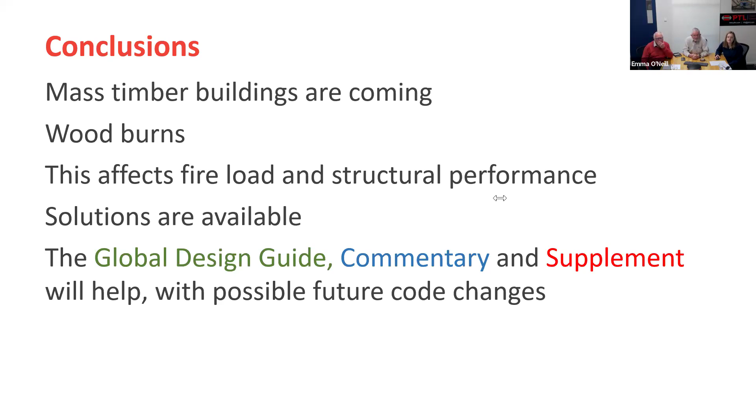I'll stop there. At another seminar, it was mentioned that the strength of timber reduces at elevated temperatures as low as 100 degrees. Should this be accounted for in the design? Should a factor of safety be introduced? Yes, that's correct, and the principles for that are addressed in chapter 12—have a look at chapter 12. Because this is a new problem that has not been identified worldwide until people started building tall timber buildings very recently, the design rules for that are a bit unclear. If any of you are going to the FENZ conference in Wellington next week, on Thursday afternoon, Cameron Douglas from our office will be giving a paper on that topic at the FENZ conference.

Does the application of the supplement to C/AS2 or C/VM2 constitute an alternative solution? And if so, is a further step of demonstrating compliance with the building code required? You have to ask your TA that question—we can't answer that. But certainly, if you're in Auckland, talk to Ed Claridge, because he was very much part of this and has been communicating with the other TAs. So I can't answer it, but our hope was that it would not have to be an alternative solution. You could use CAS2 or CVM2, and that would be accepted by the territorial authority if you followed the guideline, but only if they decide.